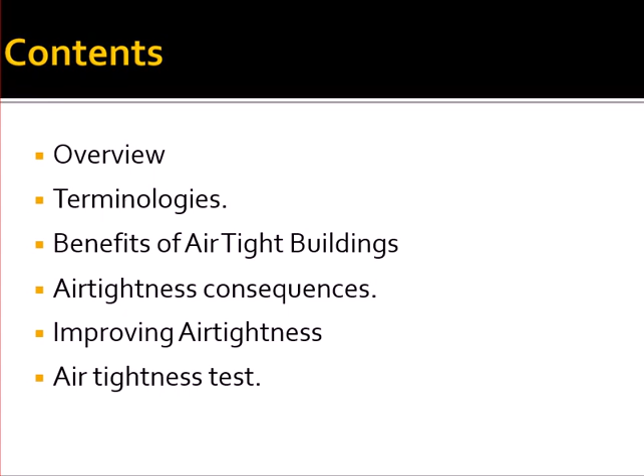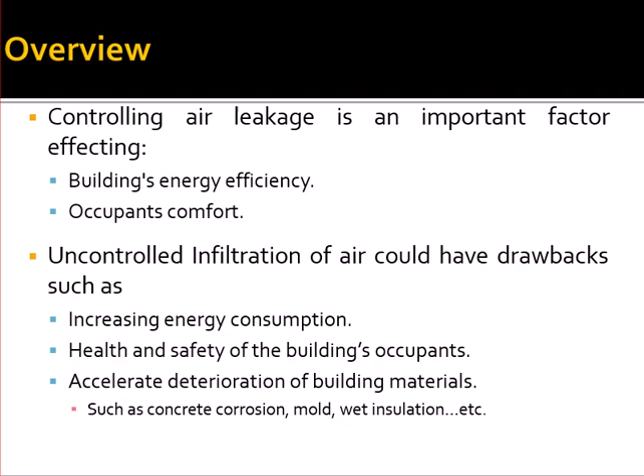Controlling air leakage is an important factor affecting buildings' energy efficiency and occupants' comfort, and uncontrolled infiltration of air could have drawbacks such as increasing energy consumption, affecting the health and safety of the building's occupants, and accelerating deterioration of building materials, such as concrete corrosion, mold, wet insulation, and peeling. Those effects can occur in the plaster as well, from plaster to interior.

Then airtightness: resistance to infiltration or exfiltration of conditioned air through gaps, cracks, and openings in the building's envelope. Causes of air leaks: pressure difference across the building envelope, and temperature difference across the building envelope. So both can occur, between interior and exterior. If there are any differences in between, you have what we call an air leak. If an air leak happens, then the tightness is going to be reduced.

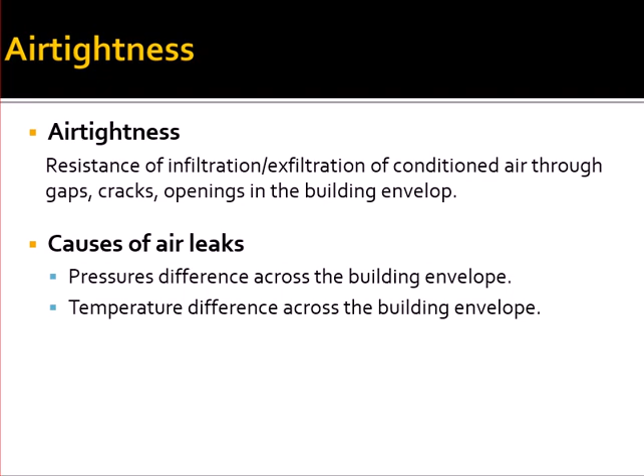Then you may face many issues like gaps, cracks, openings. If openings happen, then the tightness reduces. Air leakage refers to the unplanned, unpredictable, and unintentional airflow into the building, which we call infiltration, or out of the building, exfiltration, through the building's envelope.

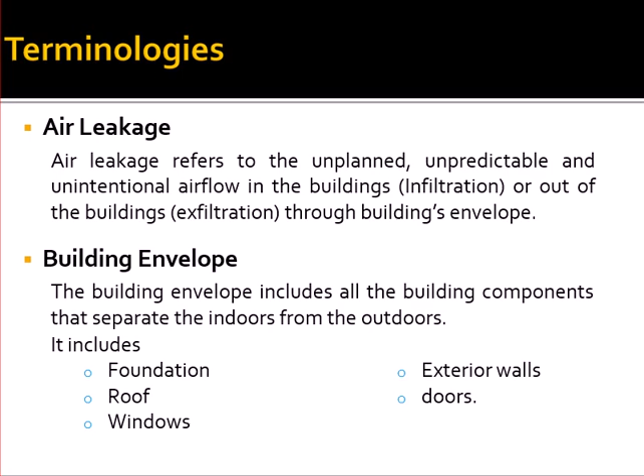The building envelope includes all the building components that separate the indoors from the outdoors. It includes the foundation, roof, windows, exterior walls, and doors. Those are the components, or elements, of the building, so they become the components of a building envelope.

Then infiltration is the movement of air through leaks, cracks, or other adventitious openings into the building. Exfiltration is the movement of air through leaks, cracks, or other adventitious openings out of the building. So that means flow to the inside and flow to the outside.

Then wind washing: air movement that occurs due to wind entering a building envelope and passing through the thermal insulation, significantly impacting the thermal and moisture performance of those assemblies. That is what we call wind washing.

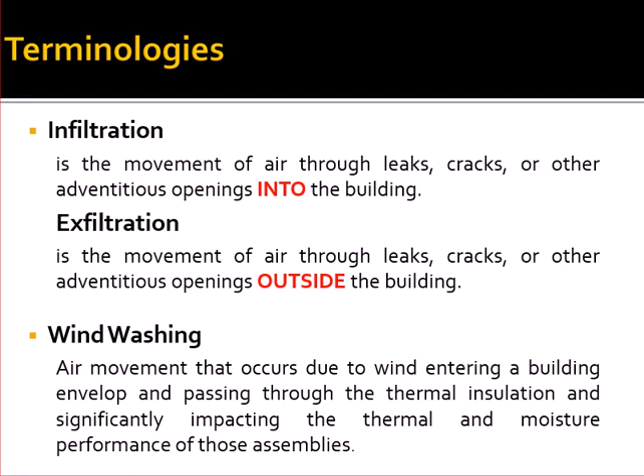And stack effect is a temperature-driven phenomenon, especially noticeable in cold weather, when warmer indoor air, which is lighter than the colder outdoor air, tends to rise in the building. It is influenced by the temperature differential between indoors and outdoors. So you have components in the interior and components in the exterior, and the temperature difference. Then the size and location of openings in the building enclosure.

I think you have the experience of fixing ceilings in the interior. You have a finish roof and a ceiling. You can see the differences. If you have a ceiling some distance from the roof, you have space in between, so you don't have any tightness against the airflow, right? There you have a lot of leakage. But if you have the finish roof, you can see how it appears.

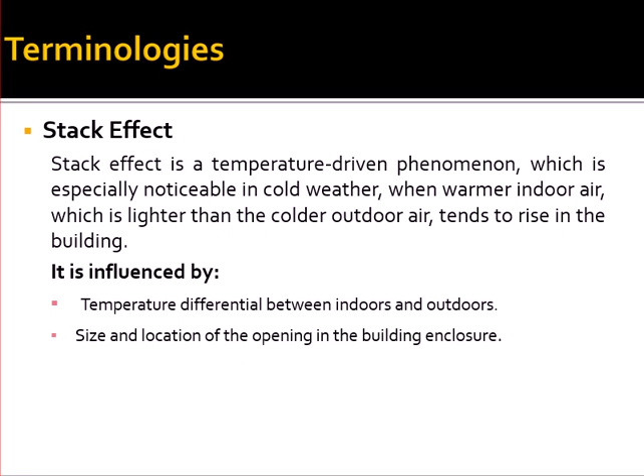I included these terminologies because if you are reading reports or journals about airtightness and this kind of terminology appears, then you can easily understand what it means, right?

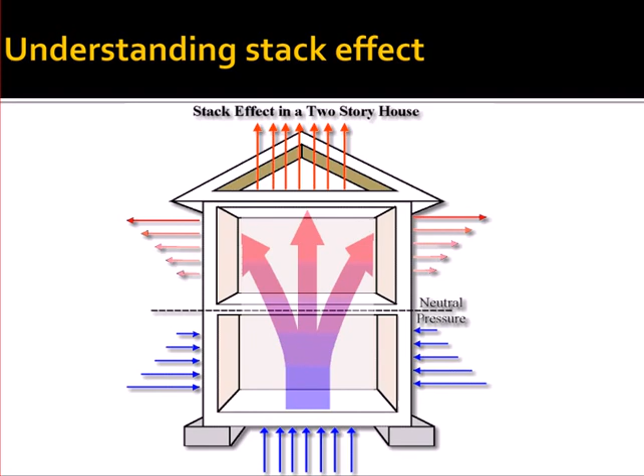Benefits of airtight buildings are very important to discuss: what benefits you get after making the building tight. Airtight buildings waste less energy and cause less carbon dioxide. You need good ventilation, because living beings inside the building emit CO2 and absorb O2. If there is no movement of CO2 and O2 between interior and exterior, the CO2 percentage may increase. But with this, there is less CO2 inside the building.

It enables right-sizing of the HVAC system. HVAC means heating, ventilation and air conditioning. Reduced energy cost, vital to achieving passive builds. You have active and passive; passive is a kind of effect we can discuss. Then reduced interstitial condensation, more comfort for occupants, and an opportunity for owners to give their buildings an advantage.

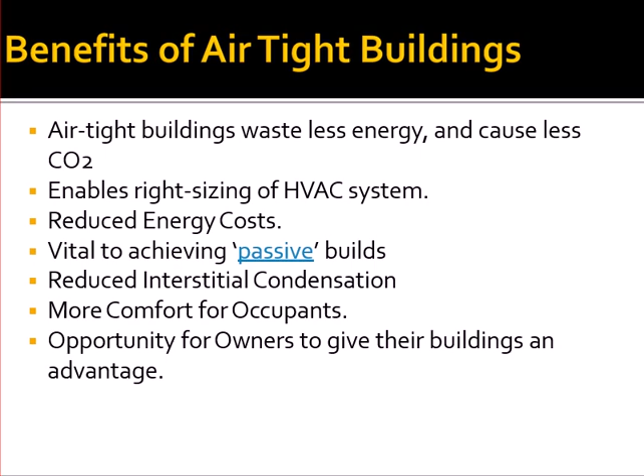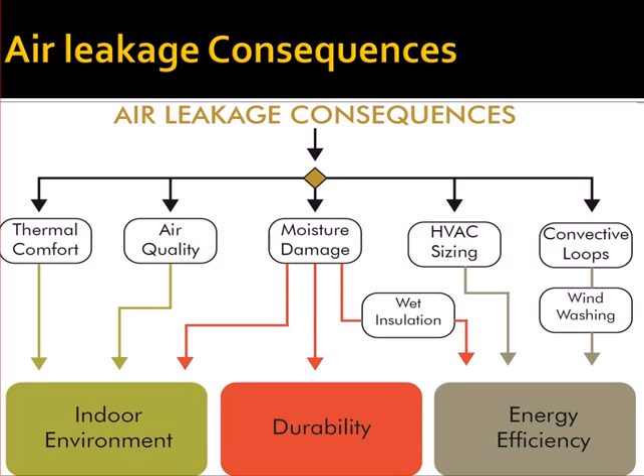These are the air leakage consequences: thermal comfort, air quality, moisture damage, HVAC sizing, and convective loops. Thermal comfort relates to the indoor environment, as does air quality. Moisture damage affects durability and the indoor environment too. Then HVAC energy, and this